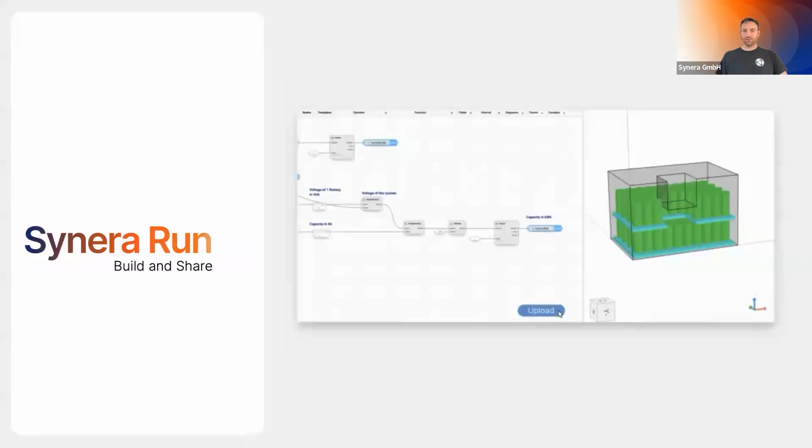Then after you save it, you also click upload, and the whole workflow gets deployed to a web instance. This web instance is accessible via any browser in your organization, and you can just share the link and give it to someone else in your organization. They can then reuse your knowledge, your automation, your workflow - what you developed previously in Synera.

To sum it up, it's really just these 3 steps: build your workflow and automation, share it via the web, and let all your coworkers use this kind of technology in a safe environment within your infrastructure.

We start with Synera Run in the web - that means you just need a browser to access the workflows. The browser site you see here will dynamically create based on the workflow you have set up in Synera. Depending on what kind of inputs and outputs you defined, this website will auto-generate, and you can just click on deploy, and it's already there - you can reuse it and share it with all the others in your company.

I think the best way is to show it in action. We prepared some demos for you to see how easy it is to integrate Synera Run into your existing workflows. Let's start with a very easy one, like a Hello World example, just to show you the whole beauty of it.

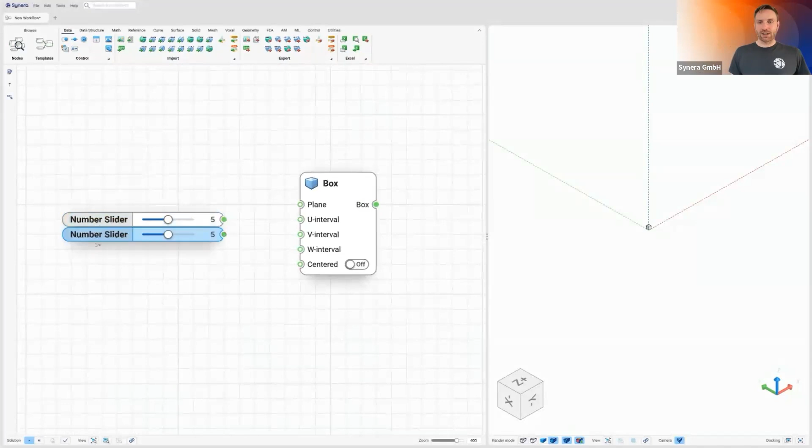We will create a box here with 3 different variables - these are our sliders. We connect them: length, width, and height. We will see we can change the sliders, and you see the geometry updates directly in the viewer. As a first evaluation, we just want to get the volume out of it.

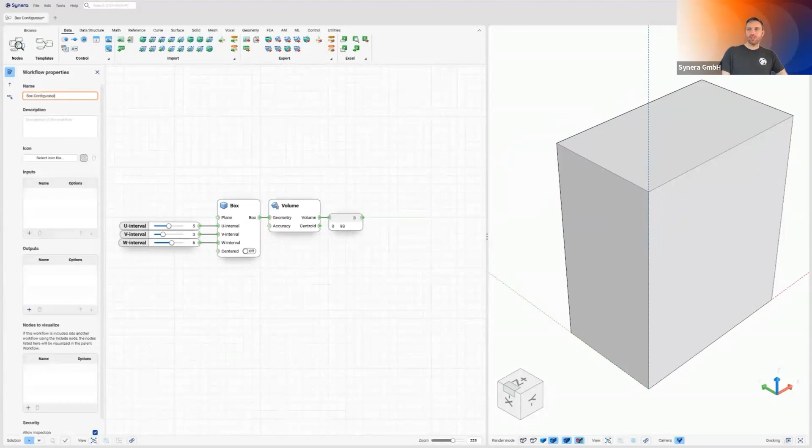So what are the steps now to bring this into Synera Run? We have this new side panel on the left where you can open all the workflow properties, and then you set up the inputs, which get these nice orange surroundings.

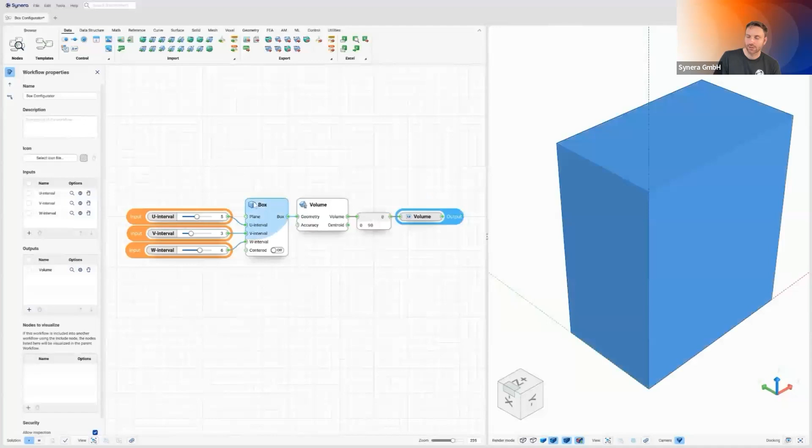And then you have to specify the output, in this case, the number for the volume. We will rename the number container to volume to make it more obvious for the end user later in the website, and then mark this as an output grip with the blue surrounding.

Now we define the box which we want to visualize in the 3D viewer. We save the whole workflow, and then it's just one click. You go on File, Publish to Synera Run, this machine, and that's it. You will get immediately the URL back, and your whole workflow is already deployed in the web.

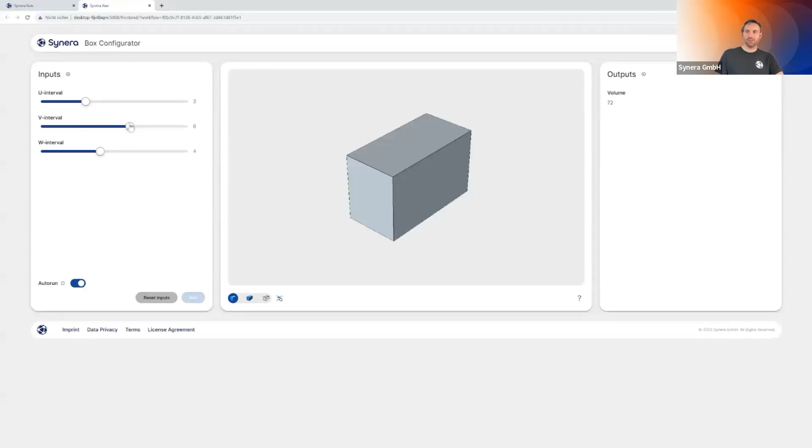You can use the viewer, you can see the preview here, you have all the input sliders. If you toggle the Autorun button, you see the immediate actions and the output on the right with the volume as an output control. So this was just the beginning. You can really create all the workflows you have in mind now for the run environment.

And to show you another bestseller in our ecosystem, it's a topo reconstruction based with the convert to quad mesh and mesh to solid operation for the subdivision modeling.

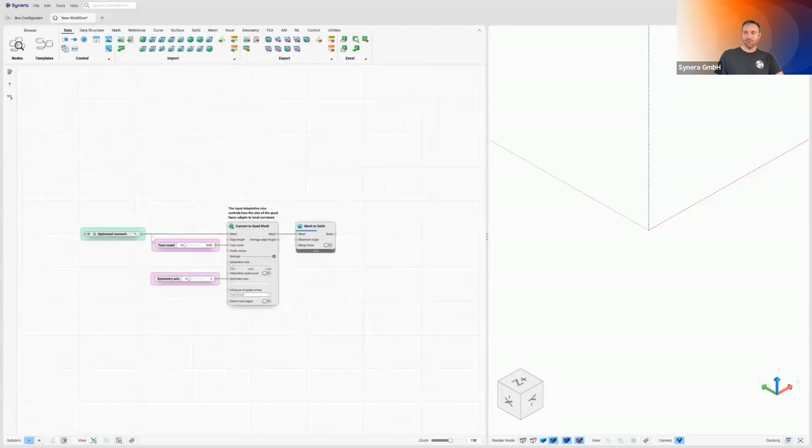So what we are doing here, we grab this template from our template engine we presented last time. We just rename the input as a mesh. And normally we want to give the people the possibility to get an OBJ file and a step file.

So you do not even need the export OBJ. You can just grab a mesh container as an output and a solid body as an output. And then it's really the same routine as I have shown you before with the box.

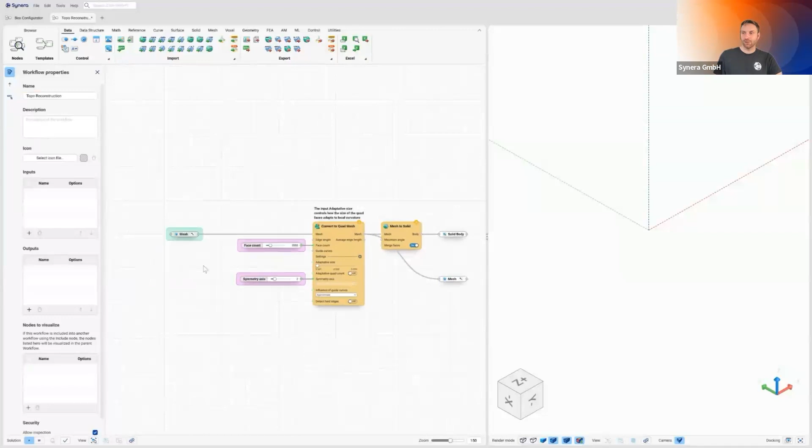So you open the workflow properties again, you give it a name just to make it easier for your end users. Then you define the inputs on the left, in this case, the mesh, and the solid body and the mesh on the right. You see the blue surrounding again.

Then I will show you how it will look like. So this could be a model you would like to process with this algorithm. So this is an STL.

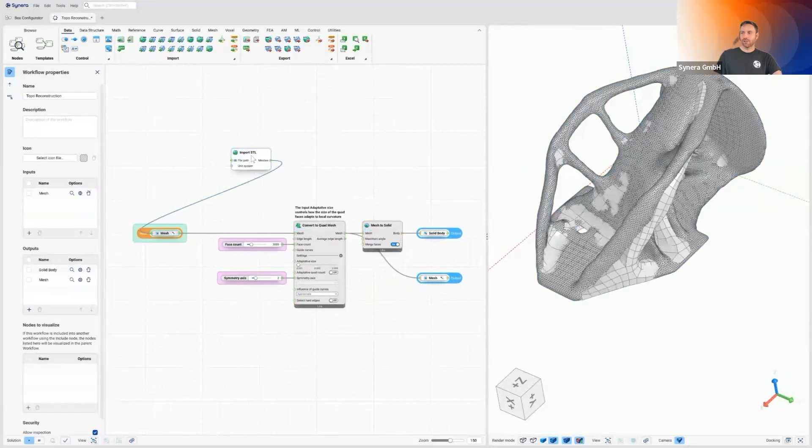You put it in the mesh container just to see what you will expect when you process this kind of geometry. And when I now toggle the visible nodes, you see this is a NURB geometry you would like to get out. And now we save it, and we want to deploy it again in Synera Run.

So we click on it, and here we go. This time we have a nicely designed upload dialog, so you can select it from your hard drive, then it gets uploaded, it's directly computed.

You see the preview of the subdivision modeling, and the two containers allow you to download it in any kind of file format you have already pre-installed and also licensed.

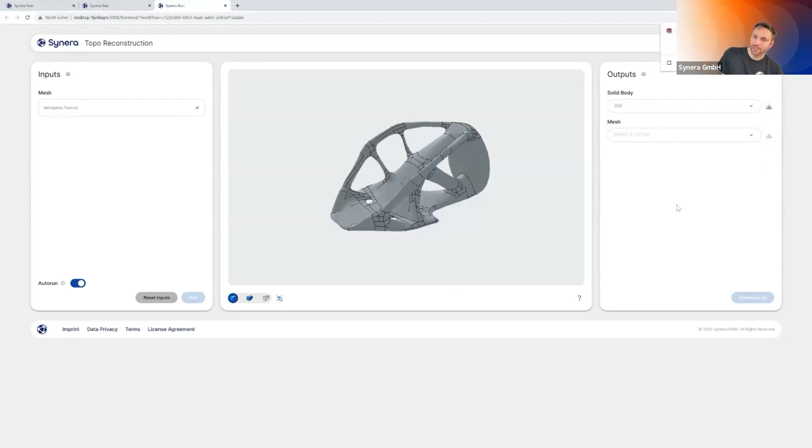We are always really curious to see what you will do with this kind of technology and what kind of workflows you bring in the Synera Run ecosystem. Here's a more sophisticated one with a battery nesting algorithm, but it's always the same.

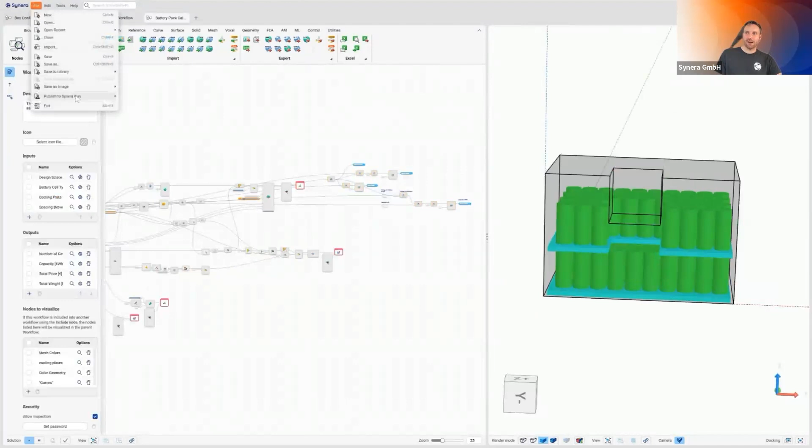So you define your inputs and your outputs. This time it's already predefined. But here we are not publishing this in a local network. This time we use it in our global network, and we open up the firewall rules.

So now everyone can access this kind of workflow. So you see, again, you have select commands, you have slider commands, you can change the input controls, you can toggle the Autorun and or press the run button, and you see the computation is then done on the server.

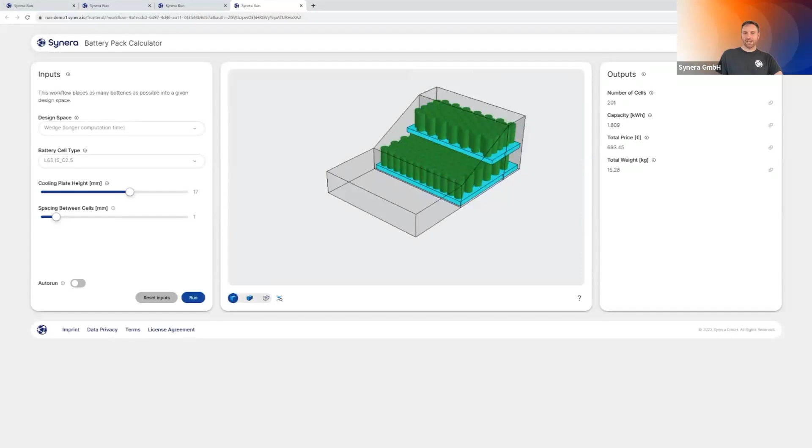Here's a new nesting result from the battery one. And as I mentioned, for this demo purpose, we open our firewall rules.

So when you go now on run.synera.io, and maybe Marvin, you can put this also in the chat while I'm speaking, you can really access the same workflow I showed you one minute before, and you can reuse it in a web environment, even across the company network.

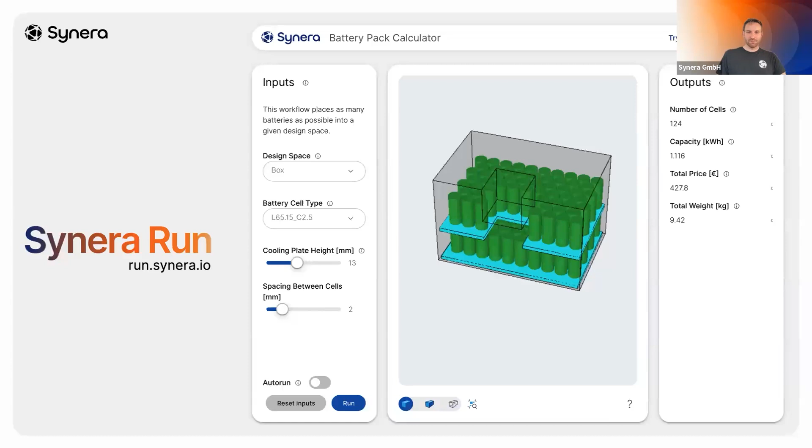And today we have Heinrich Schmidt from ARRK Engineering, who will show us how he's already utilized this new technology in their daily work and how they make workflows powerful in this web environment. So Heinrich, the stage is yours.

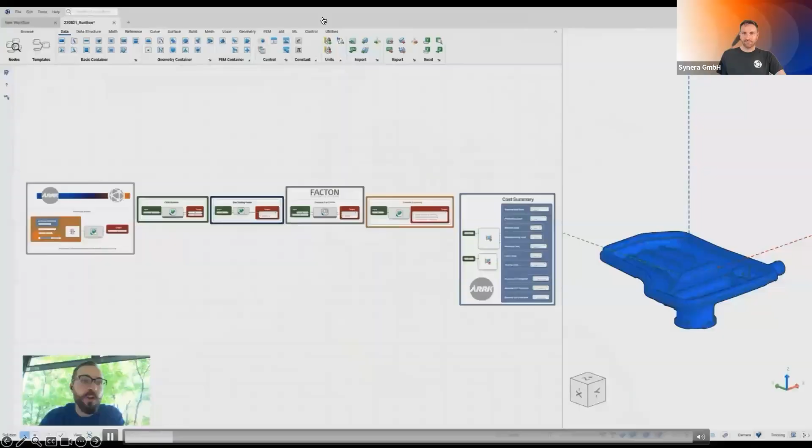So let's jump right into it. We start with a little purchase prompt: which part are we calculating, and how many parts we want to calculate. Then we grab the CAD data as well as the metadata for the part from our PDM system. The metadata would include things like material, maximum wall thickness, and so on.

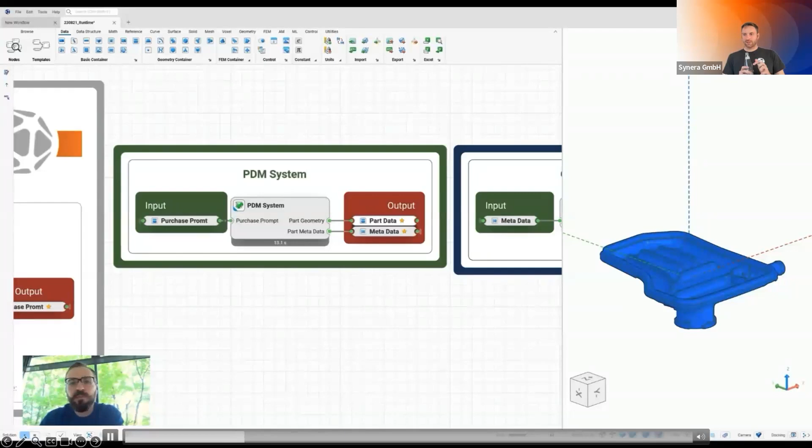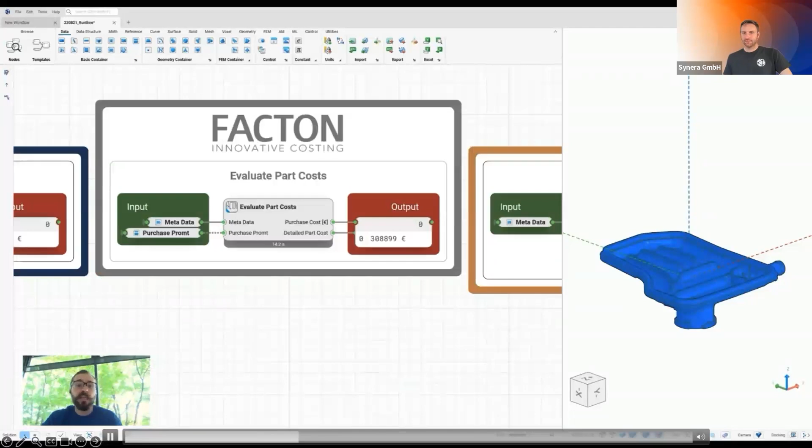And we need some further calculation, so we jump over to the tooling cost, which we receive from a third-party software. And then, a little cross-promo for Facton - they've been so nice to give us access to the API to calculate the production cost of a single part, which is pretty neat. It works pretty good, I have to admit.

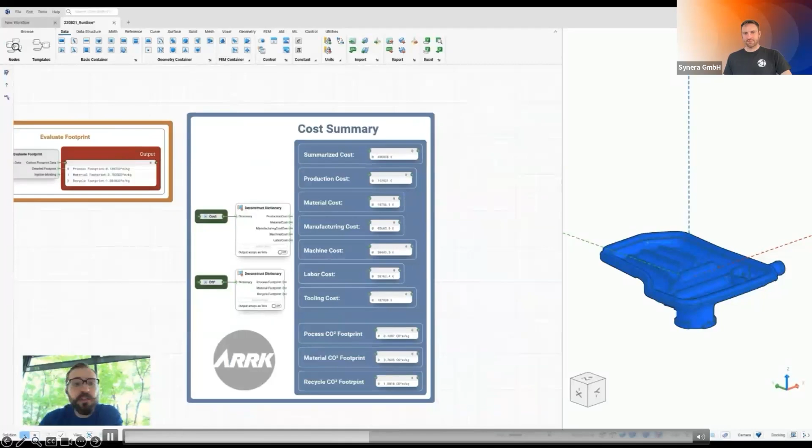And then we go on to the CO2 footprint, also from another third party, receiving our environmental cost for the parts. And in the end, we receive a cost summary of the whole part, which includes the production cost, tooling cost, and the environmental cost.

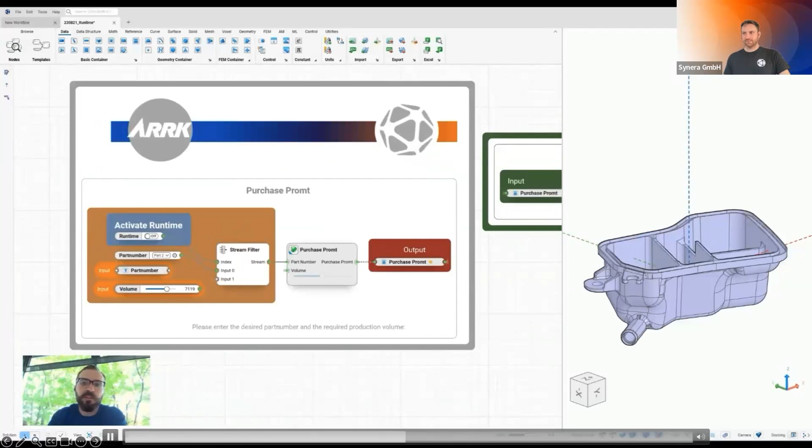Now we get to the interesting part - we want to publish the whole thing to the Synera Run. For that, we implement a little toggle at the start so we can change the inputs, whether they're within the workflow or fed from outside, like a run. We activate that toggle, and then publish the whole thing to Synera Run by just clicking File, Publish to Synera Run, and to this machine - and it's actually done.

So we could jump over to the run, which would look like this. On the left-hand side, we see the inputs we defined previously. It's the same systematic as in a classic workflow if you want to nest it - you have to define inputs and outputs. It's 2 clicks, it's easy.

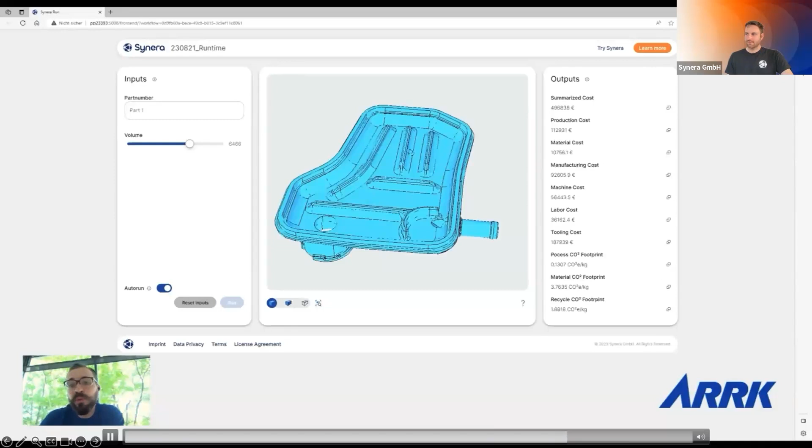Then, to activate it or run the run, we have to add the part number as well as the volume of parts we want to produce. Then the run is running, and we see in the middle our part - it's a classic 3D viewer you used to know from the desktop application. On the right-hand side, you see the costs we calculate within the workflow.

And if we switch now the part, it's recalculating, and we receive yet another cost calculation and CO2 footprint. And that's actually already the run - easily done, literally within less than 5 clicks. So I think it's pretty handy and easy to use, and I hope to use it in future quite more often.

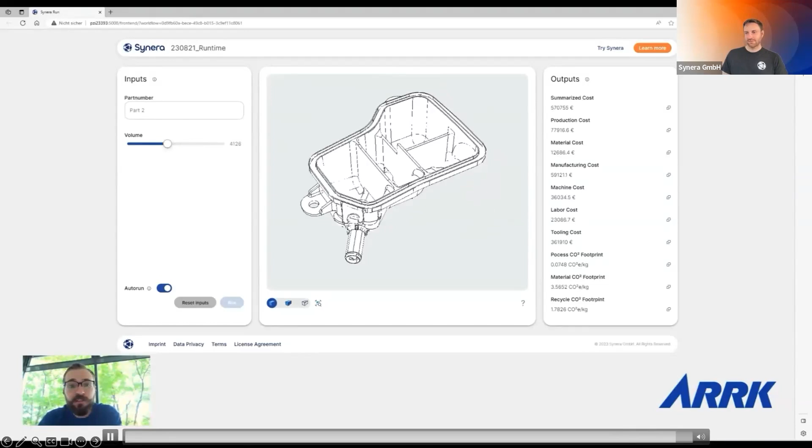So cool, thanks Heinrich for these insights. He just deployed a cost engineering workflow within seconds in the run environment. And what I heard from him is the beauty is that especially in cost engineering, you have a lot of people who would love to get access to the volumes from CAD geometries and all this stuff, but they normally don't have access to CAD geometry or CAD tools. So with this, we can fill a gap here and use Synera Run to utilize even cost engineering workflows for people who are normally not familiar with CAD operations.

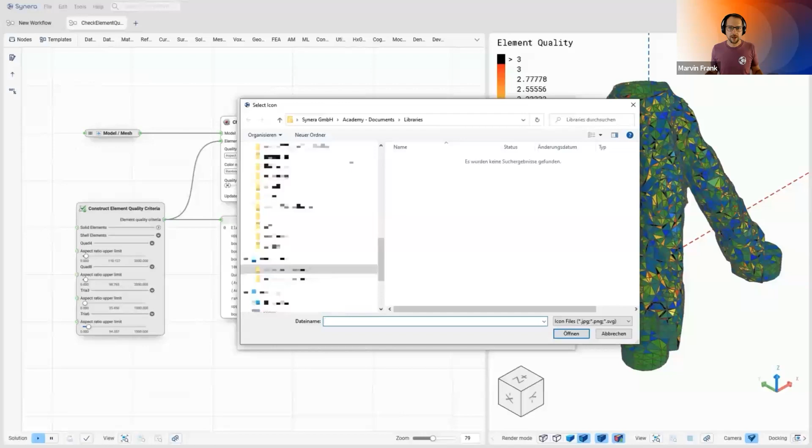Go to Tools, create a new library. We can give it a reasonable name, and we can also set an icon if you like. Of course, I would choose an FEA icon. I can give a library description, and in the end I choose a file path, in this case to a SharePoint, because I want to cooperate with other users. So a final check if everything is good to go, and then we can create the library.

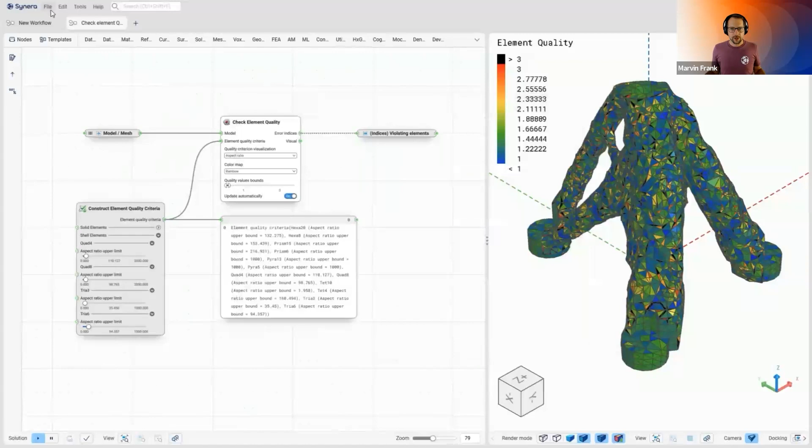So here I have my workflow, and I save it in the library I have just created. I can also give the workflow a name, and you can see in the blue banner on top that it is saved in that library. So if I open a new project, a new tab, that workflow is directly accessible through the radial menu.

Okay, so now user 2. We have a second user, Daniel. He's a CAD expert at another department and has a similar repetitive task, checking a body. This time Daniel wants to save this workflow as a node, so he defines inputs and outputs.

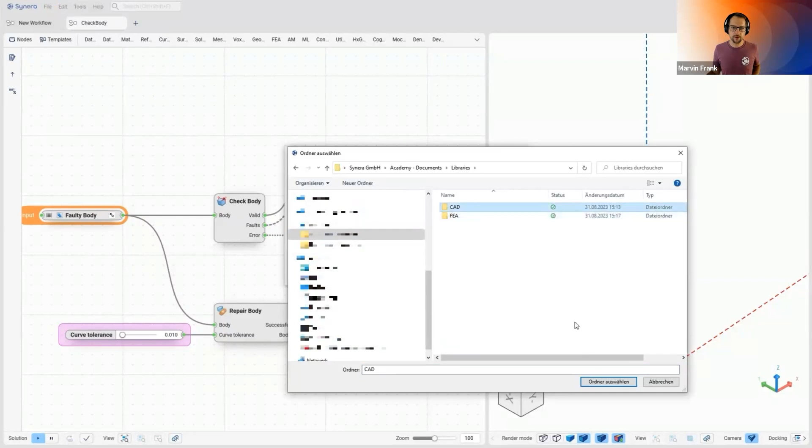A name is given to the workflow, chosen automatically from the workflow. We can save it, and as you can see in the blue banner again, it's saved. Similar as before, I go to another project, and user 2, Daniel, has direct access to his CAD library and to the node he has just created out of that workflow.

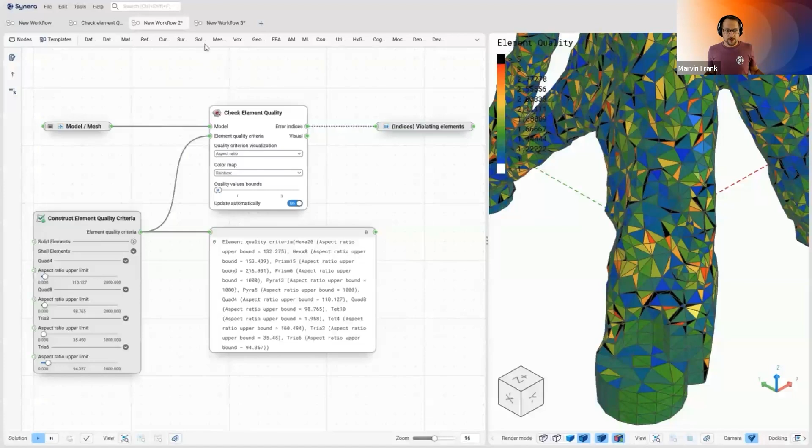So back to user 1. I have a faulty geometry, but I can't wait for Daniel to fix it for me as a CAD expert. So now I can use his expertise, since he saved that in the library. I can just integrate this library with my ones that I had before.

So now I choose the file path, and you see the CAD library is next to the FEA library. I like that. So now when I go to the radial menu, I also have access to Daniel's expertise and can use his node he just created, and I can check the body for myself.

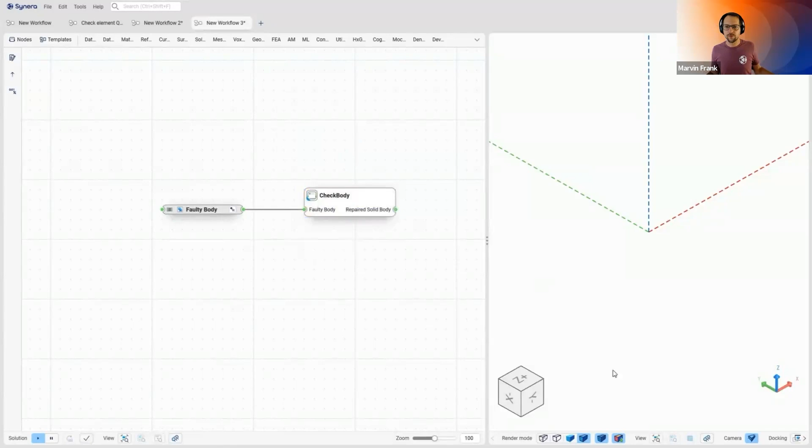Yeah, that's the total story. So we saw collaboration over the SharePoint, but in enterprises it's not only SharePoint where we can collaborate. So we now have the PLM integration for Teamcenter.

Automation workflows or cooperative work means that we need to interact with these PLM systems, and we are super happy that we can introduce the Siemens Teamcenter integration. So at the end, it is only 2 nodes, very easy. We pull from Teamcenter and we push to Teamcenter.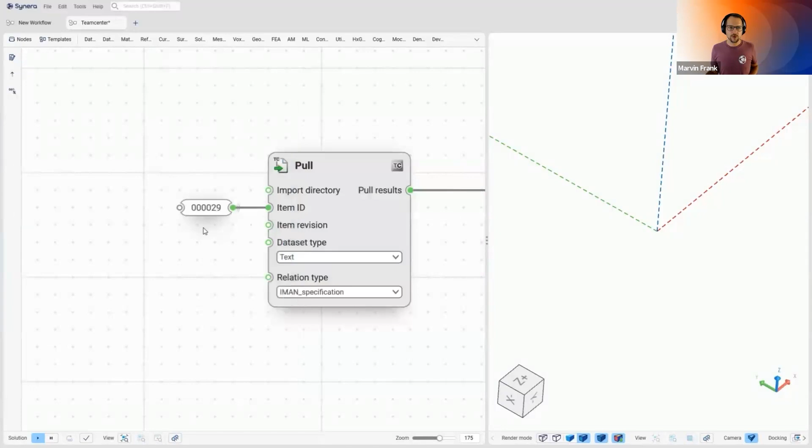At first you define your item ID and you pull that item from Teamcenter. It's an NX file, a geometry file, so here we use our run_nx node. We have now imported that, but we're also able to change the parameters - that is done very quickly here.

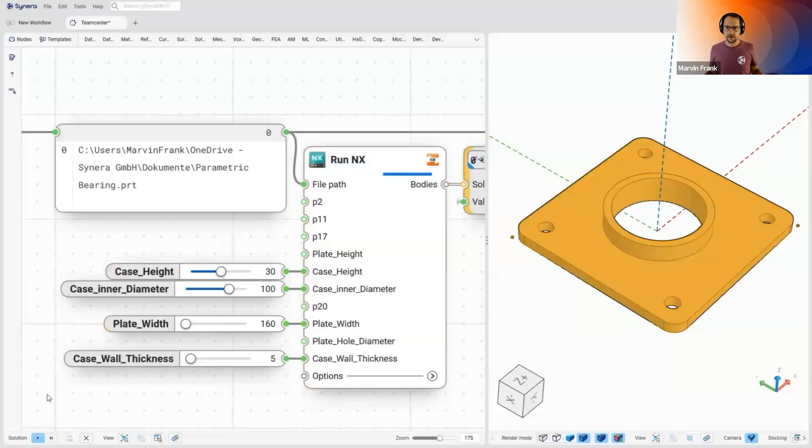We change the parameters of the file, the geometry updates, and when that is finished we can push it back again. So here we trigger that, push it back again, and then the updated file is back in Teamcenter and ready to be used by other departments.

Yes, that's the whole story. So it's about creating, sharing, and reusing in between colleagues and departments, on the workflow level but also on the enterprise level, through communication, in this case with Siemens Teamcenter.

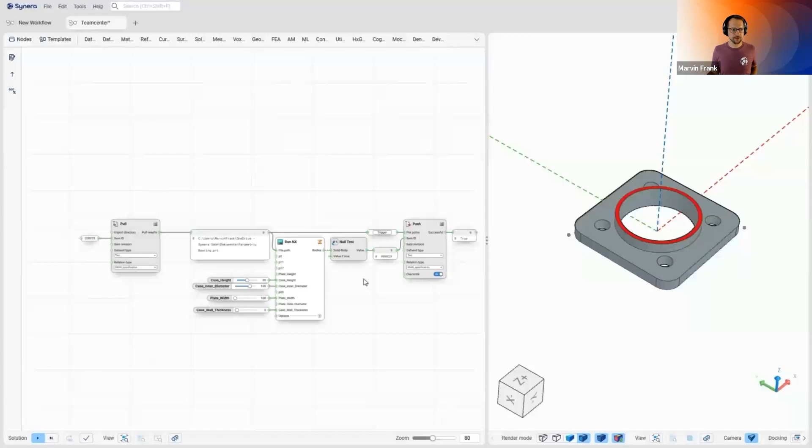All right, cool. Another one, yes. We have the last category for today, right? The last category for today, and for that, we'll give it back to you first, and let's see what else we have in the improvements.

Yes, so the last category is shared by Marvin and me. It's our general improvements. We have tons of smaller improvements done over the last weeks, and to give you a glimpse about some of them, we created some slides.

First, we will introduce 5 new nodes in the category of time. This means you will have access to construct dates and times, deconstruct them, create timestamps from the current time, and also use it for formatting time.

And 2 workflows we always hear from customers: the first is, I want to have dynamic naming of, for example, files or directories. So you can use the construct date nodes to make exactly this.

You have a formatter, you have a merge text, and at the end you get, for example, this directory title, and you can use it with the create directory nodes we presented last time. Another workflow where you could use these new nodes is to measure time, like how performant your current workflow is.

You have a start and an end, and then you can measure the computation. Here at the end, it's, for example, this small hello world product, 5 seconds. So a lot of possibilities with these new nodes.

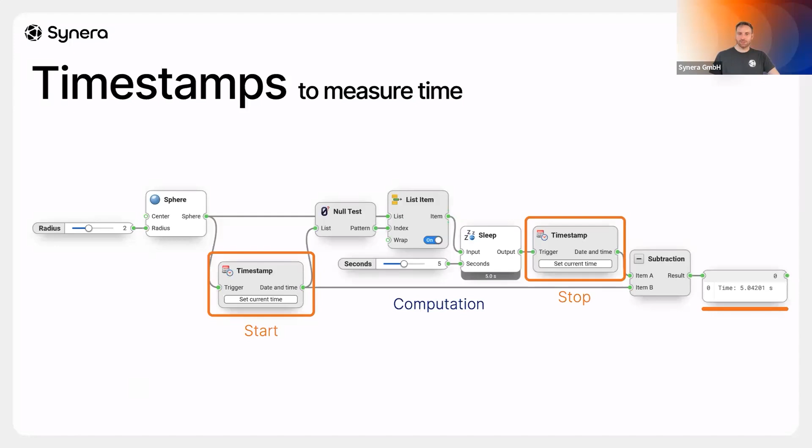Next, we implemented for our expert users a new node called dynamic control. It looks so simple because it has just one input, but it's very powerful. First, when you put it on the canvas, it says it needs this dictionary, otherwise it can't compute, so it's yellow. But if you put a dictionary in, and here I put a select possibility, I create our dictionary with our construct dictionary node and an array from list, and I put in option 1 and 2. Then you see that this select control is directly created on top of the dynamic controls node.

This gives you the power to programmatically change controls, whether it's select or other things. For example, if you put a slider in it, you can use the quick notation we normally use, or you can get a Boolean in it, and you see we have a toggle now on the dynamic controls, or even a typical text holder. So you can really stretch it here and make your dynamic controls possible with all the construct dictionaries and this new node. You can use it for changing the boundaries of sliders or making them dynamic. We saw a lot of requests in this field, all a little different, so we're curious to see what you'll end up with this new power. Here's another example where I get some list inputs from sliders with minimum and maximum, and I created these sliders also programmatically on the go. So a very small but powerful new node.

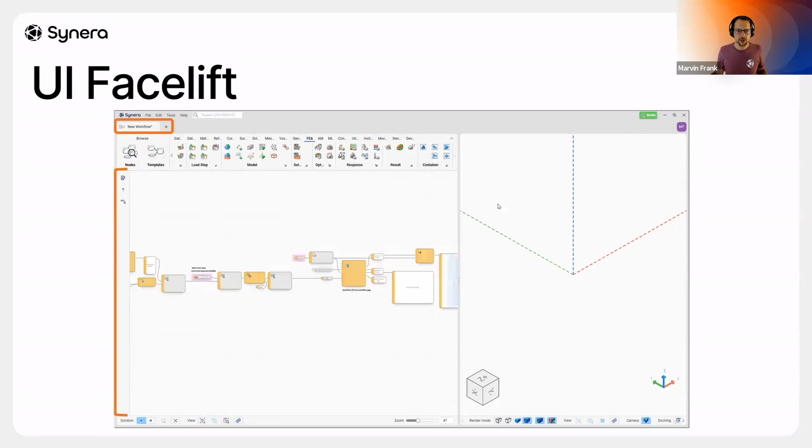Then on the side, we have the control bar here, the sidebar, it's also collapsed by default. And when you open a workflow, for example this template about reporting, you can unfold the sidebar and use functionalities such as setting the dedicated icon, or any other descriptions you can add here to define your workflow.

Then also you can see that the icon is directly moved to the workflow tab, it appears there, that's the little update on top. And on the right, that is also a very new feature, you see a news banner. At the moment we publish news regarding the marketplace, so whenever there's an update in the marketplace, you will be notified here in this news banner.

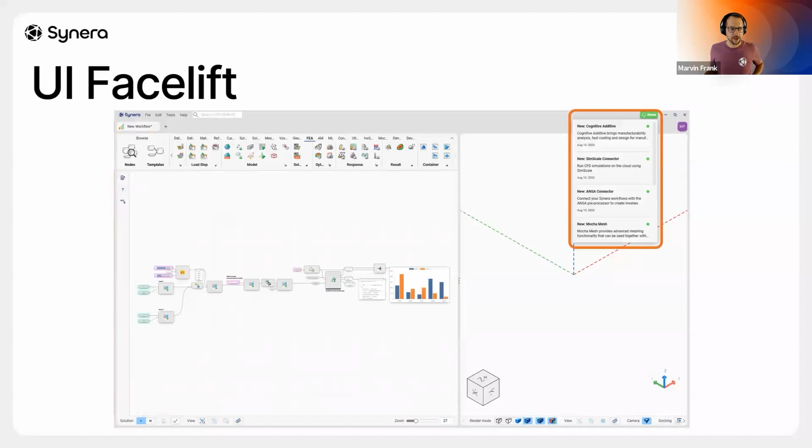Okay, then we have another new improvement regarding the viewer. You remember last time in Geeky Gaia we had already one, with viewer performance improvements up to 50 times faster regarding bodies or surface bodies spinning around in the viewer. That is because our customers challenge us more and more with more complex workflows and more complex assemblies and geometries.

So here we have something more, this time regarding FEA visuals and points. We had very heavy benchmark data, and they appeared to have an average frame rate of 1 frame per second in the very heavy data. Now we managed to improve the performance up to 36 times, with an average frame rate of 36. So larger FE models and points or clouds of points can be visualized much better now.

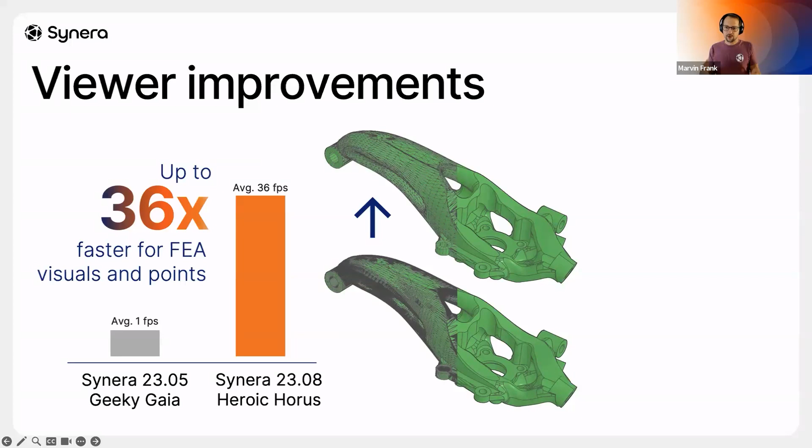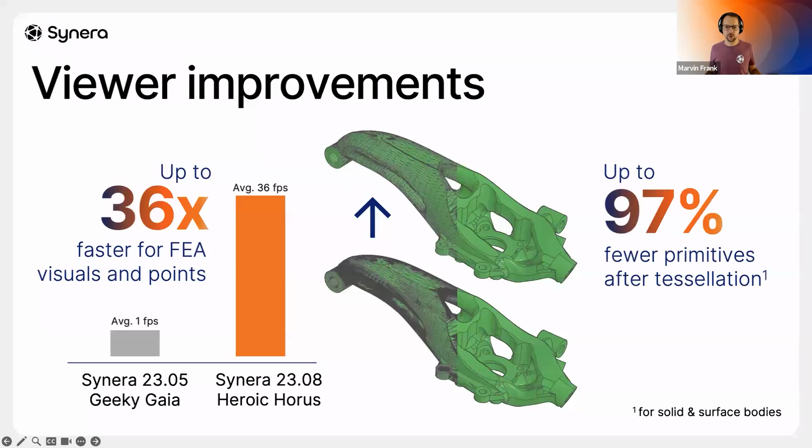Another very interesting tool, I like it a lot because when you sketch and think in processes, as you usually do in low-code and in Synera, sometimes you need to go one step earlier, to sketch processes, but you can also use this tool to document better in your workflow. So now we have integrated a whiteboard.

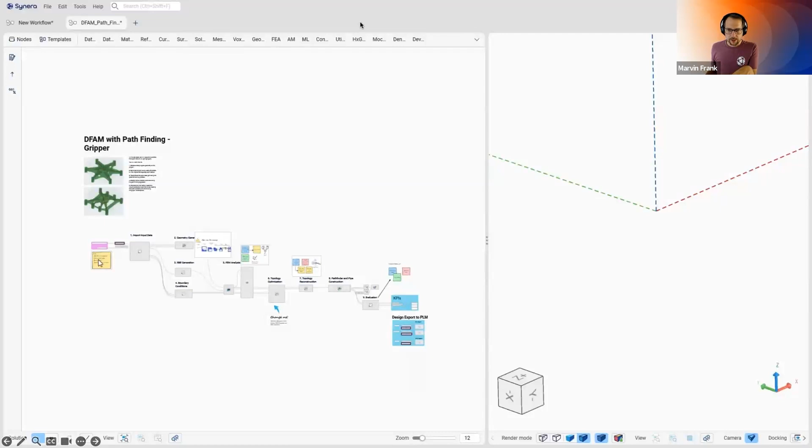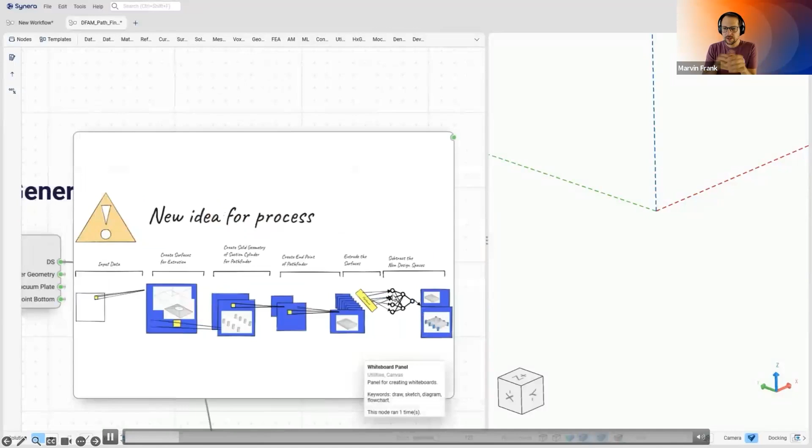Let me show you a little example. This is how it could look like in the end, in a larger workflow. At the beginning we have a to-do list, for example, I want to document something for my colleague, or I have another idea for the process included in this particular node. Then I want to add some sticky notes here for my colleague to clean this up, or for myself, or also hard copy something to keep in there, using the graphics, but having that inside directly in the workflow.

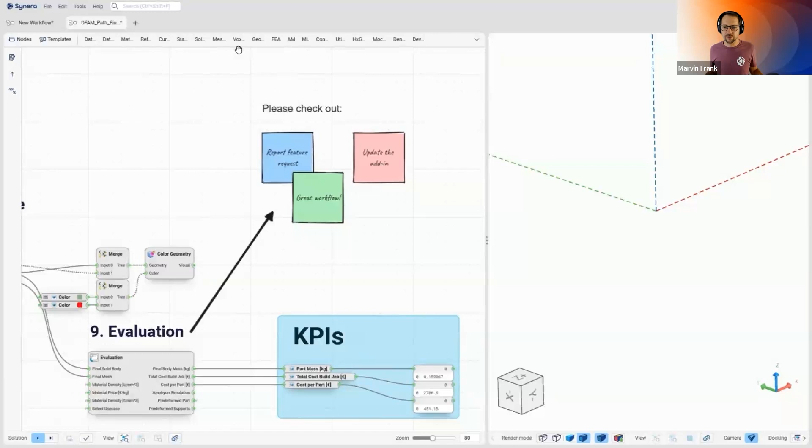Okay, thank you. So let's see how it works.

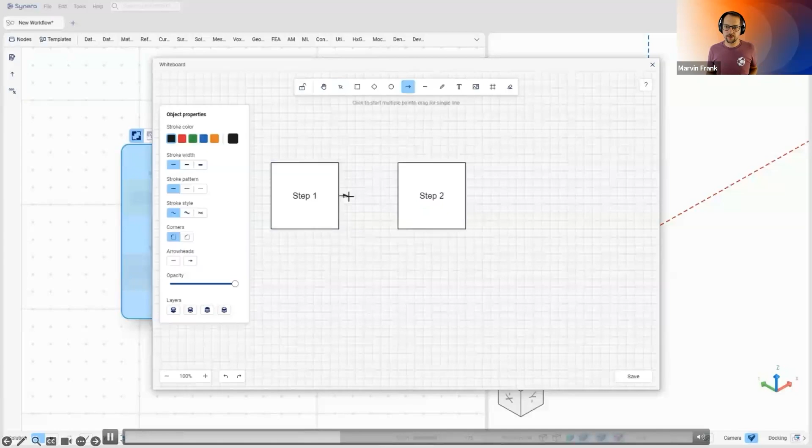You can find that under utilities and canvas, and there's the whiteboard panel. It appears, and then you can click it, and there's some familiar features you might notice. You can draw boxes, assign colors, set the opacity, things like you're used to. For example, here we just quickly set up a little process, step 1, step 2. You might have another sub step here. And if you're done, you just click save. It gets in the whiteboard panel.

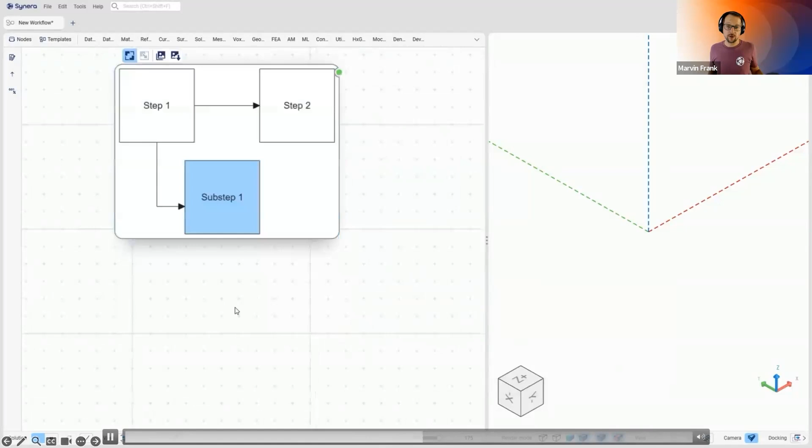Then first in the settings, you can fit the size to the actual process you have built up here. And you can copy that, like hard copy that as a picture. And you can also save that as a picture to your local drive.

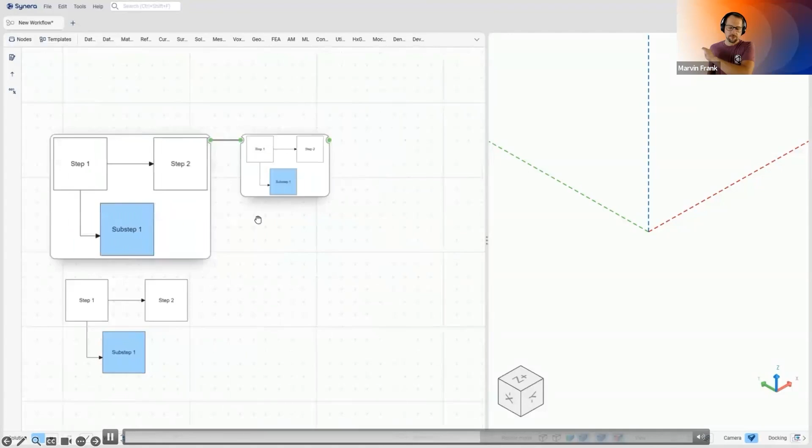Of course, you can use that using the viewer panel and other spots in the workflow. But the interesting point here is that it is an open library. So when you go to excalidraw.com, if you want more features, you can choose anything you like from that open library.

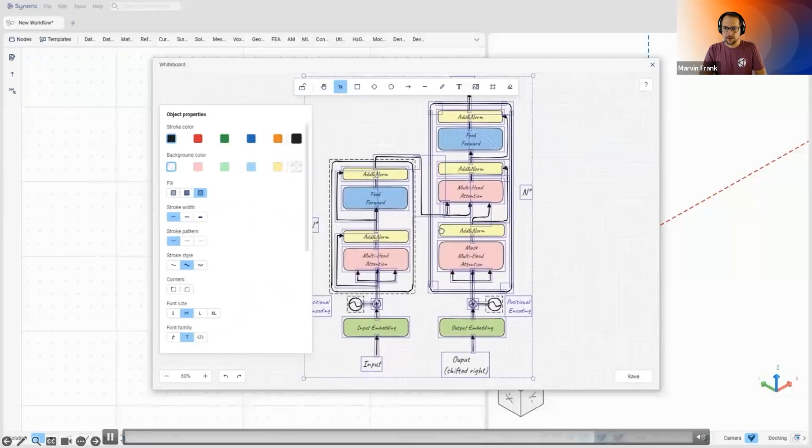For example, this little sketch here, I really like that to document something in my workflow. I copied that directly inside the whiteboard panel, clicked save, and it's available as the other process I drew before. Yeah, similar with anything else.

There are more libraries, so you can just go there and type something in, like I just want a simple sticky note. You add it and you use it as before.

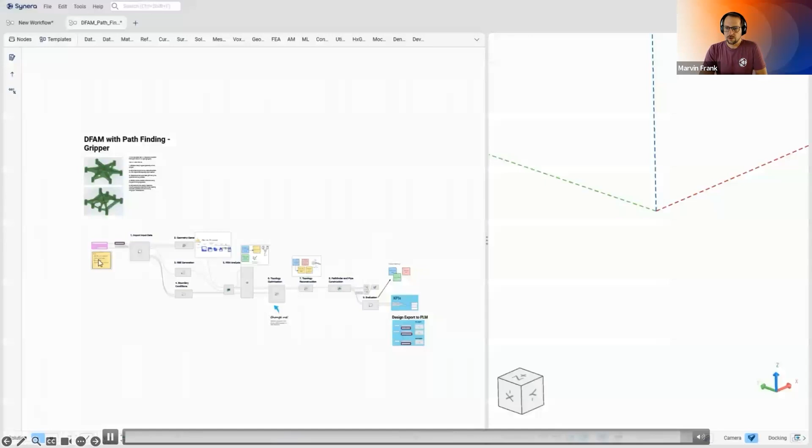Okay, so I'm really curious how you're going to use it and how you're going to nice up your workflows with this tool.

Another very little node, but it has a huge impact if you build especially larger workflows. While you develop it, the careful listener or watcher of that webinar has seen the little spoiler before in my presentation, but it's the trigger. It's a very small node. Let's see how we did it before.

Imagine you have a little more heavy operation, like the convert to quad mesh and the mesh to solid. So that might take some time. If you want to adjust some parameters, of course you can pause and play your workflow. What you usually do when you work in the workflow is, for example, you disable a node, something like this. So I disable mesh to solid and I can change my parameters. That would be an option.

I can also disable the cable, which is cool, but also very tiny, so not so easy to spot for maybe a colleague that you want to share the workflow with. But now you can just insert this trigger here. That is how it looks like when it's closed. No data is flowing, so you can play around with the values of the sliders at convert to quad mesh. And when you're happy with the setting, you can open it and then the workflow runs through.

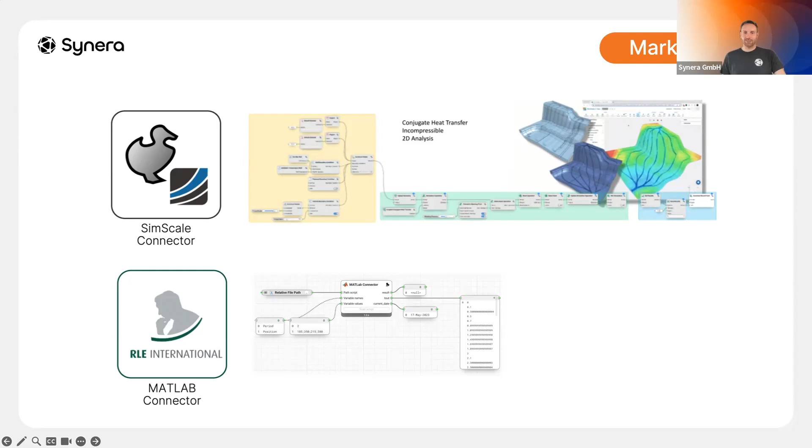Okay, that is the marketplace. And to sum it up, this was the new release keynote presentation, 2308 Heroic Horus, with Run, with a lot of marketplace updates, with the new timestamp nodes, Teamcenter integration, a lot of node improvements, the whiteboard feature too - especially in the early days when you start with Synera and you want to sketch your process first and then remodel it, it's very powerful. And the reuse library, which allows you to spread the knowledge from Synera across different departments and reuse all the programmatical workflows you already created.

So we hope you enjoyed the show today, and it was so much fun as we had here on stage. I see we have 3 minutes left for our time slot, and we have 2 questions. So maybe let me quickly open it. It was more 1 question and 1 congratulation here, so it's also nice to see this.

So there was 1 question: could you give access to a workflow outside, so I assume in the internet? Yeah, you could do this, but be careful - at the end, it's your computation power. But yes, this is possible, as you saw it with the run.synera.io and the battery model.

This is possible. And then, thanks to the other - it was not really a question, it was more a cheers, awesome release. So yeah, we also think this is an awesome release, so I'm happy to get your feedback on it, and we are really open to see what you guys will do with this new kind of functionality.